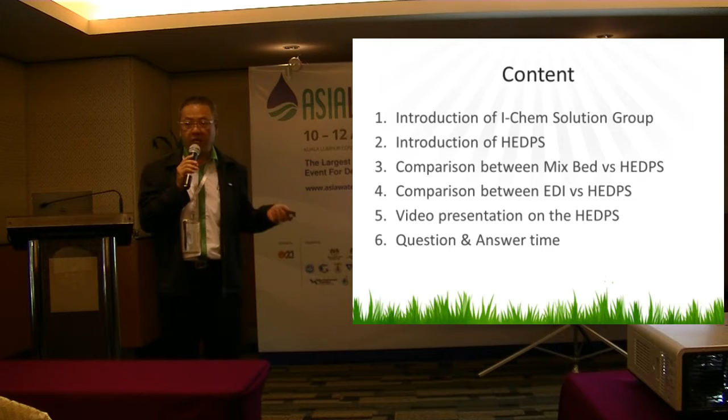Today, I would say that we are present in Malaysia, Thailand, Indonesia, Singapore, Vietnam, Bangladesh, Myanmar, Laos, Cambodia, and the Philippines. Basically, we are a regional-based company, but our HQ is in Malaysia.

Okay. So today we have a team with the green shirts running around in the exhibition. All my technical staff are engineers, chemical engineers or mechanical engineers, with more than 200 years of combined experience now. My management staff have a minimum of 20 years in the water treatment field, and have been working in MNC companies. So this is how we work.

So you can see that we are not just strong on the chemical side. I-Chem Solution is strong on the biological side also, biological treatment. We have also set up a very comprehensive lab where we can analyze all the wet chemistry, deposit analysis, resin, product development, R&D. HEDPS is part of our R&D together with universities. We also optimize the specifications needed for the water. For the past 15 years, I-Chem Solution has been very focused on water only.

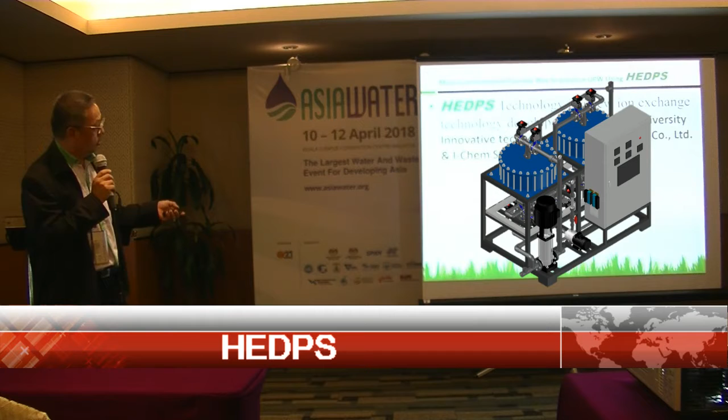So now we actually go into the HEDPS. What it does is more toward the process. Nowadays people are talking about Industry 4.0, where the system can be fully automated. That is one of the directions we work on together with the university, and we came out with the idea. It was about 3 years of work, 2 years of research. Then they patented it. Now this unit is fully distributed for ASEAN countries plus Sri Lanka and Bangladesh.

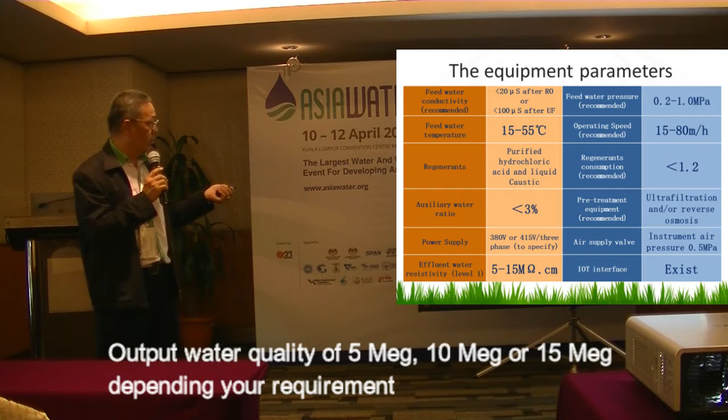So I want to give you a very quick rundown on this one. This unit basically depends on the feed water quality and on what output you want. The output water can be 5 megaohm in terms of water quality, 5, 10 or 15. That will determine what your input should be. So your input can be from below 20 microsiemens after RO or below 100 microsiemens after UF.

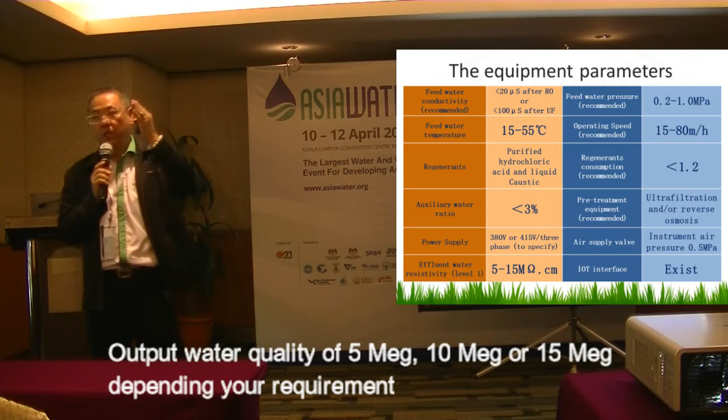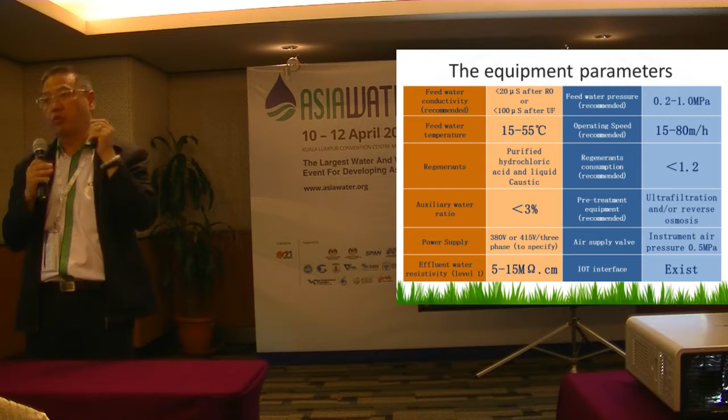Why must we have the pre-treatment after RO or after UF? That is because this resin is only about 10 cm to 15 cm high, and there is no free space. So there is no tolerance for suspended solids. That means the SDI itself must be quite good. Normally, if you talk about SDI, you want to control it below 5.

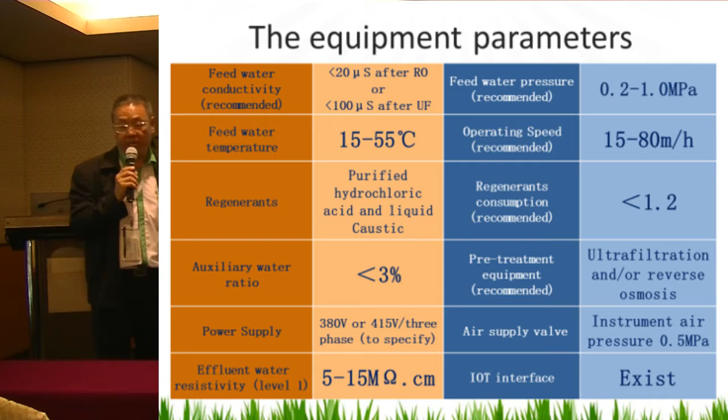The feed water temperature, we say 15, that's the normal temperature. But the key thing here, the regenerant is still purified hydrochloric acid and purified caustic soda. Feed water pressure 2 bar to 10 bar, that's what we can run the flow at.

Then the key thing here, the regenerant consumption, compared to a normal resin, normal twin bed or mixed bed, where you require 200 to 250 gram per liter resin. In here, you probably require about 30 to 50 gram per liter. So that's how we work it out. Later I will show you a comparison of how much the saving is on the regenerant side.

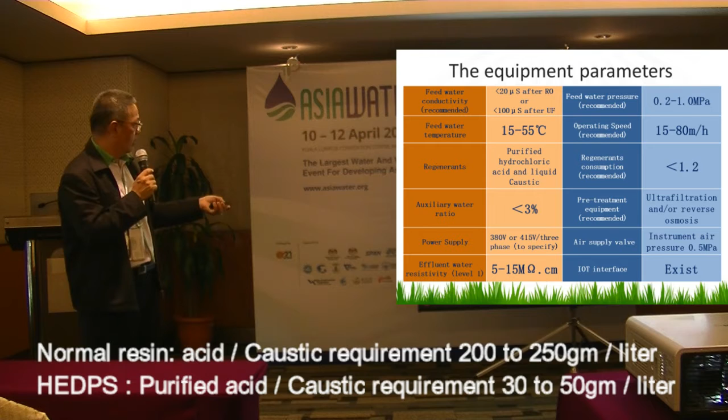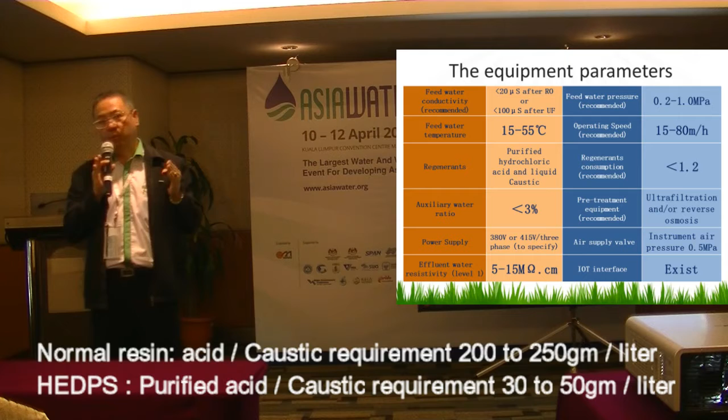Then you are talking about the ratio. For this resin, for this system, the rinsing time and the regeneration time are very, very short. Normally, our program runs only about 10 minutes. For the twin bed, for the cationic, normally you run about 3 minutes. For the anionic, another 3 minutes. The rinsing time, about 4 minutes, then back to service.

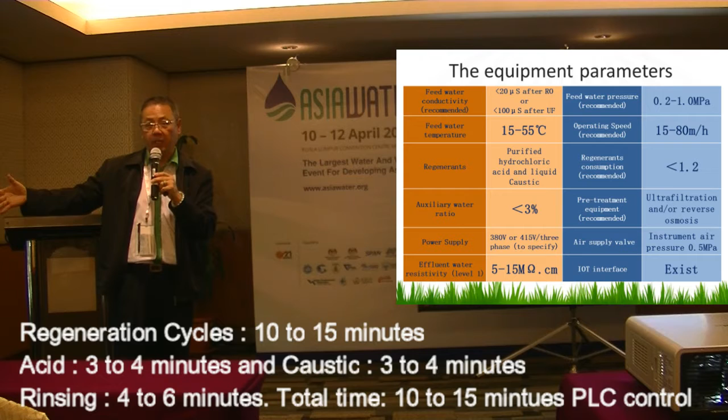So the whole process is about 10, at the longest you can program it up to 15 minutes. That's how you control your output quality. But if you maintain, let's say 10 meg, then you can run it shorter.

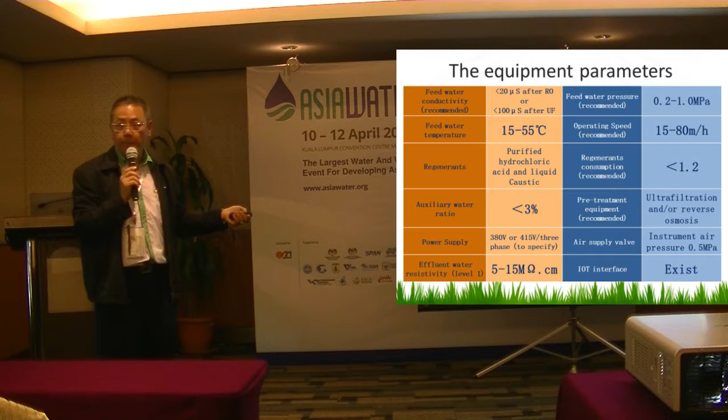Then instrument air, and the pre-treatment requirement is either UF or RO, reverse osmosis. And the IoT access: this is a fully PLC system with a data logger inside. So you have data every 10 minutes. You can plot the graph and know what is happening in the system over midnight, because generally you don't need any people to be there. It runs fully auto.

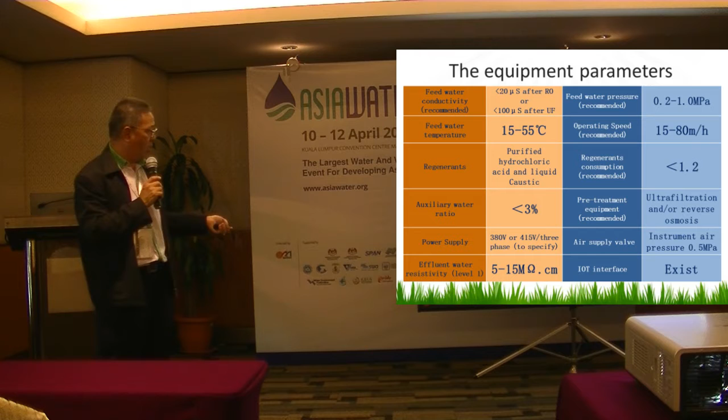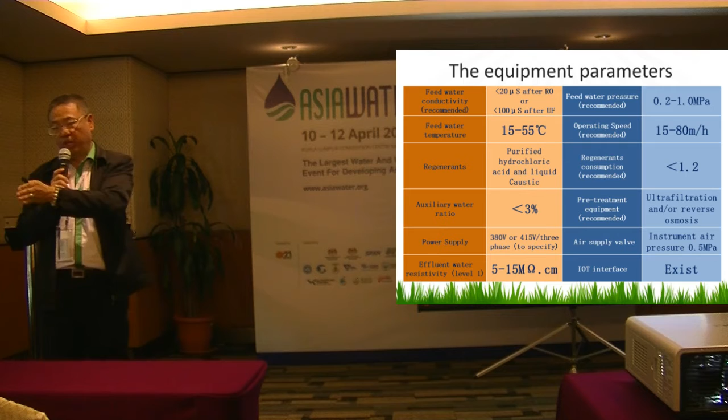Okay. The water quality outlet, you will get about 5 to 15, depending on the input. 5 megaohm is the lowest, normally about 0.2 microsiemens. For medium pressure boiler feed water, that's good enough. Some electronics users will look at 15, then go into electronic grade polishing to get to 16.8. That is for the electronic side.

So this is the modular unit currently available, 10 cubic meters per hour flow rate, or 25 or 50, depending on the bigger size. We can design custom made up to 100 cubic meters per hour, but that needs to be customized because it depends on what quality you prefer. Okay, but this is the modular one we want to promote in the market.

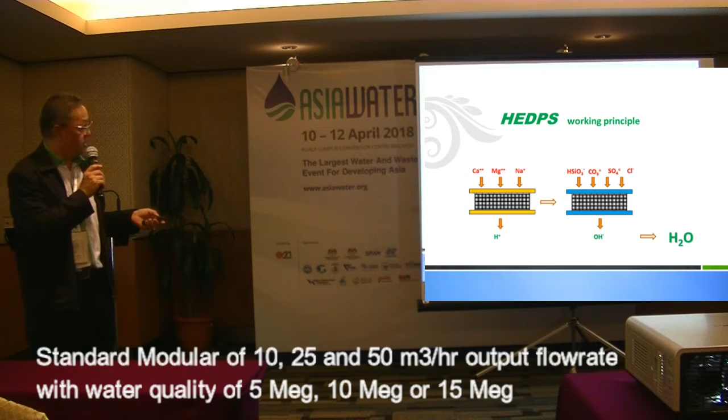Okay, this HEDPS working principle is very straightforward. It's the same thing. With the cationic, passing through this one, you will get your H. Then the water passes through another anionic module, and you get OH. Then you combine them and get H2O.

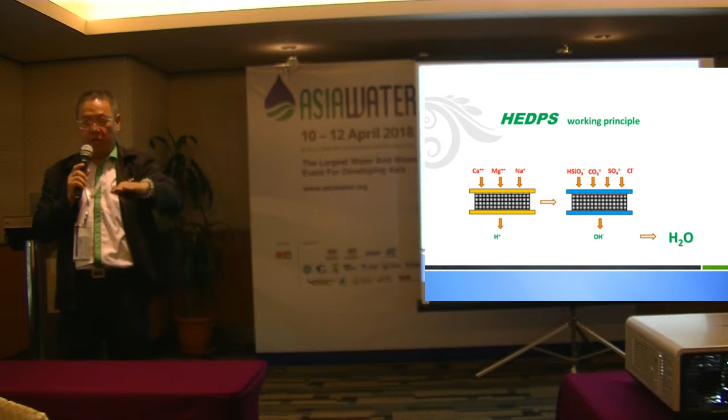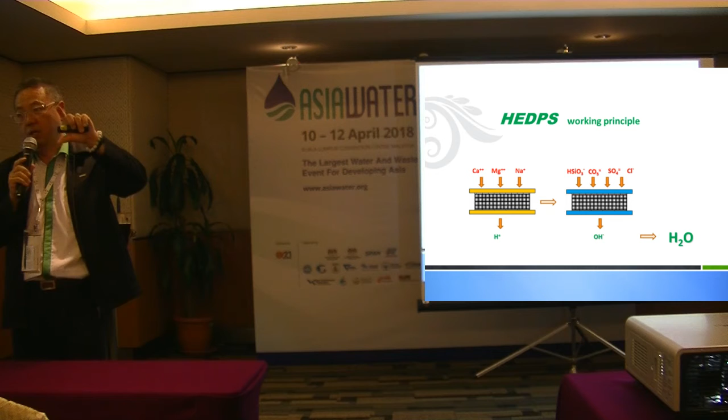It's exactly the same as your twin bed resin, except here they remove your exhausted resin zone and the ready-to-regen, ready-to-serve zone. You only take the working zone. So that's the reason why you only have about 10 to 15 cm height of resin in the vessel.

So this is a comparison between mixed bed and HEDPS. Okay, I give you a very good example. This is a system flow rate of 25 meter cube per hour. Water quality required is probably more than 10 megaohm. So water saving, you can imagine, if you talk about the regeneration step for the mixed bed after RO, you want the mixed bed running. So your regeneration probably is about 5 days, 120 hours per regeneration.

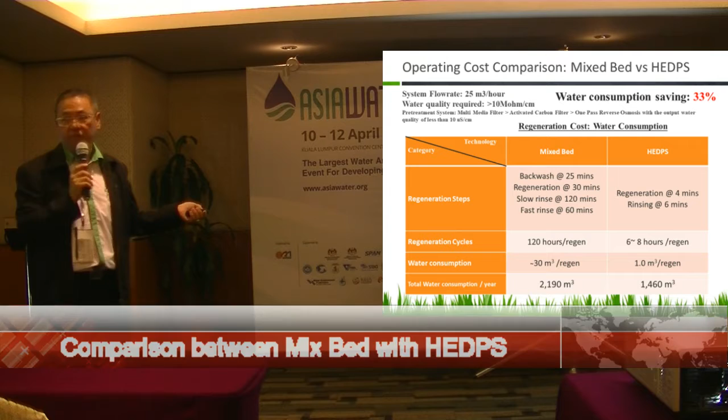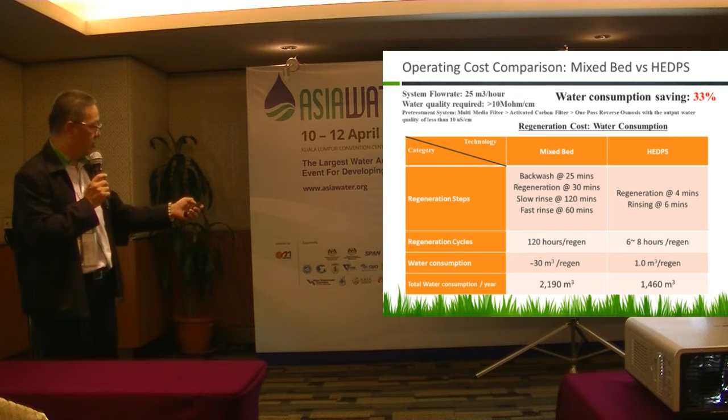So you require around 4 to 6 hours regeneration time per regeneration cycle. And the water you use normally per regeneration is about 30 meter cube. So you have to have clean, good water, 30 meter cube, for the rinsing time. Based on this calculation, your total consumption of good water is about 2,200 meter cube per year.

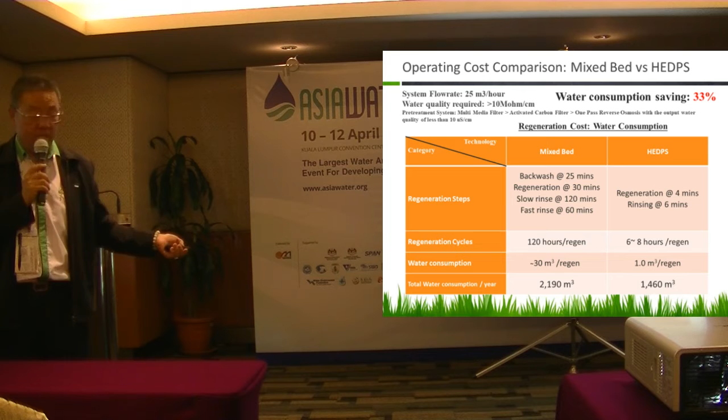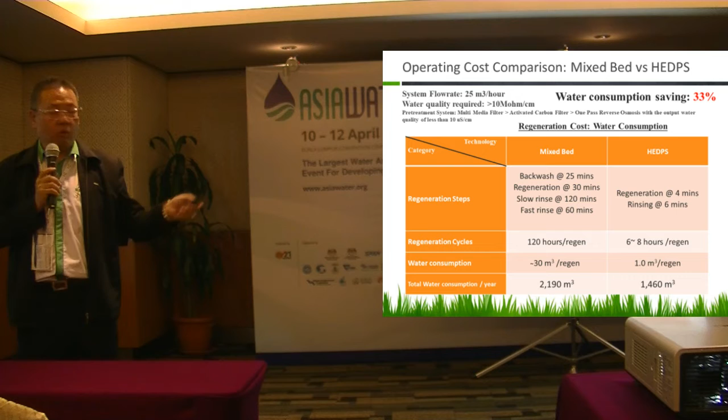But based on the HEDPS, your regeneration time is about 10 minutes per regeneration. Each regeneration cycle is about 6 to 8 hours, normally. Our unit running in Senawang is up to almost 30 hours because they are not running continuously. But if we run continuously, it will run around 6 to 8 hours per cycle. One cycle, you only use about 1 meter cube of water for rinsing.

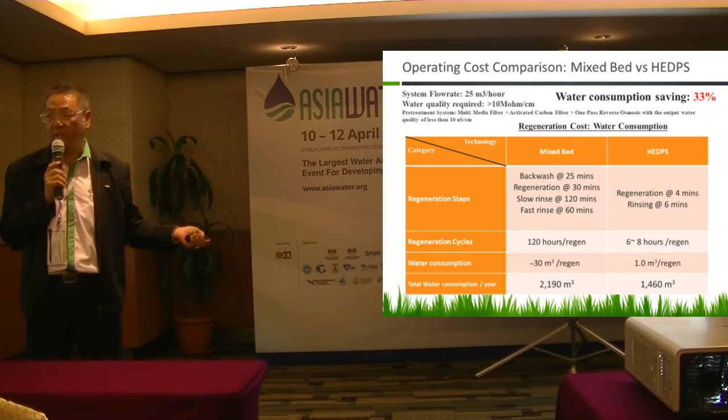Then, the total water you use per year is about 1,460. So you are saving per year close to about 700 meter cube of water. Okay, this is compared to the mixed bed. How about their chemical consumption? I think this is something more interesting.

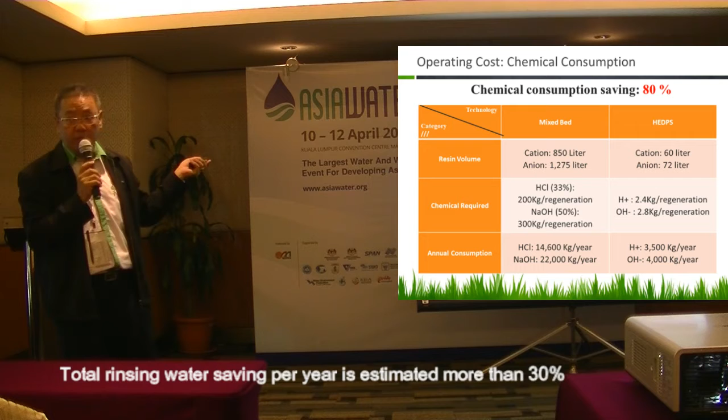Based on the 25 meter cube, if you look at the resin volume, we need about 850 liters, because normally you need about 100 gram, 100%, per liter of resin. You work out it's close to 200 liter of 33% acid. So you require every year about 14-15 ton. But if you compare, the resin volume here is about 60 liter, so you need only about 2.4 kilo per regeneration.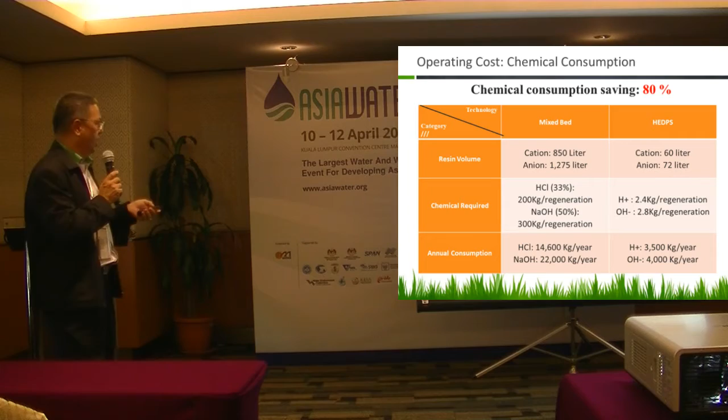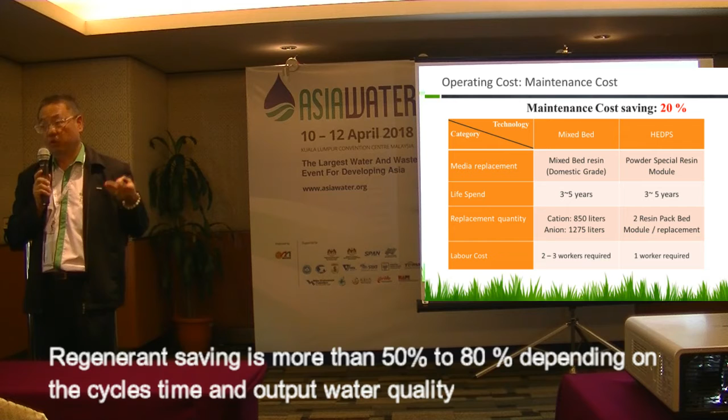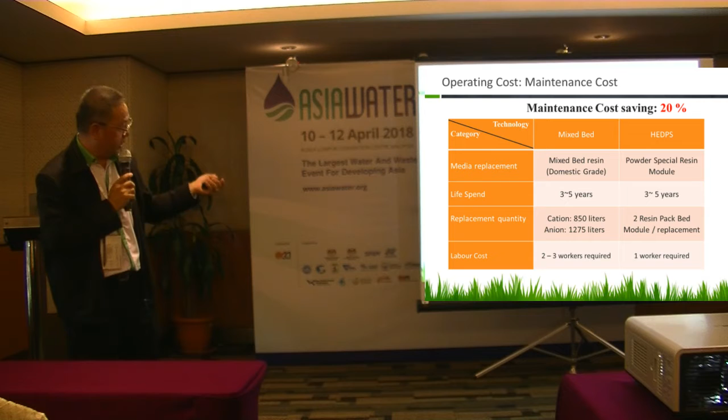Then, mixed bed compared to HEDPS on the maintenance side. For the mixed bed, resin needs changing every 3 to 5 years, depending on operation. Here it's the same, probably 3 to 5 years. But because we only focus on the exchange side, not on suspended solids and fouling, we only change the module.

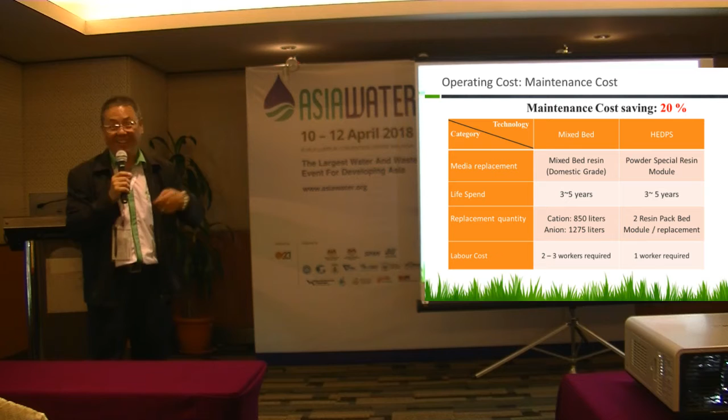Because this resin is packed like a cake, it's something like plug and play. You change your anionic module, plug in, and within probably half a day you can run again. With a mixed bed, easily you require about 2 days just to put it back into service. So this is how you compare the mixed bed and the HEDPS system.

Then how about EDI? Most of the time people talk about EDI because so far it can produce the best water quality without any people interfering. Not like mixed resin, where you need a lot of regeneration, people have to pay a lot of attention, and you need a skilled worker. But EDI has drawbacks, which you probably all know.

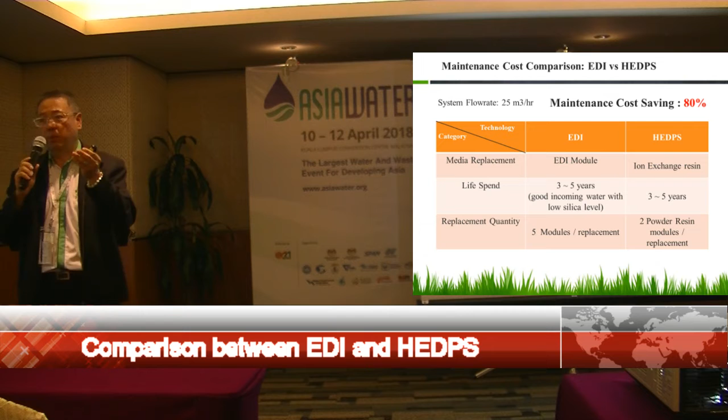To run EDI, you need a 2-pass RO, 1st pass and 2nd pass. Why? Because one bad drawback of EDI is that it requires very good water quality. Generally, it requires a very low silica level in the water. That's why they run 2-pass RO.

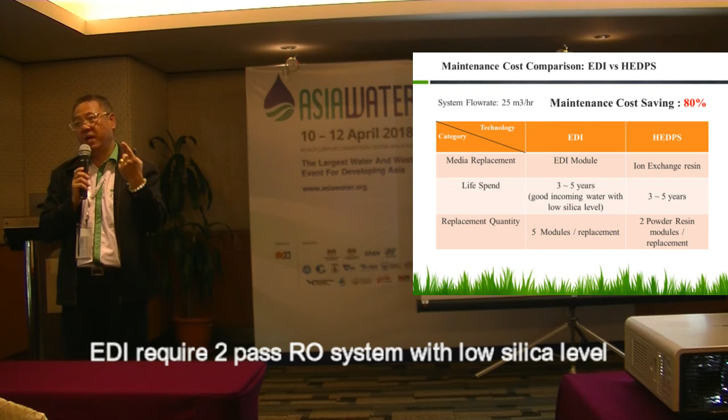For HEDPS, you only need to run 1-pass RO. 25 meter cube, 10 meg water quality. Same thing, you only need to run 1-pass RO. You don't need 2-pass RO. Then you will say that the lifespan here, when you change the EDI, is a module. One module, you change everything.

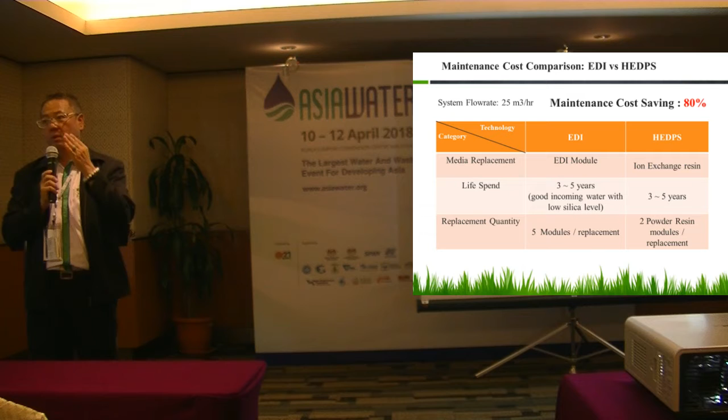One module currently probably costs us about 20,000, 30,000, depending on which model you are taking, from Taiwan, from US. It's easily that. Then you have to replace everything. So here, what you need is you only replace the module. The system, everything is just pump, valve, piping, the controller. That's all. You only take it out, put it back. So that is actually how easy it is.

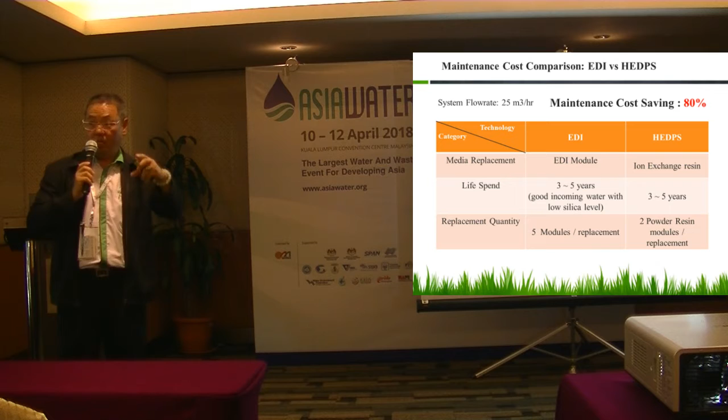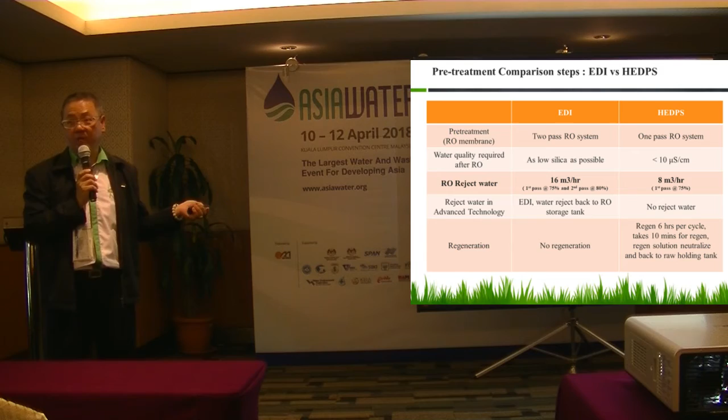So the maintenance cost itself, definitely compared to EDI, the payback is much better because with EDI you have to change everything, the module. Then EDI, I just now mentioned 2-pass RO, 1-pass RO, as low as possible. Reject water, let's say you need about 16 meter cube compared to 8 meter cube for 1-pass RO. So that means if I run 25 meter cube, this one I need to have about 41 meter cube feed for the pass.

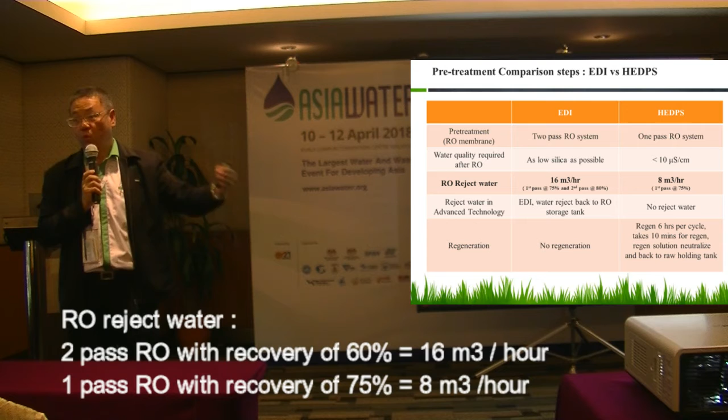So I need a bigger pump to run 2-pass. But this one I only need about 25, 33. I put a smaller pump so I can save on my investment side. Then all this one, you can see no regeneration, but EDI, basically the water reject can go back to RO storage, then you can use it back. Same thing here, but here you need no reject, but you can also reuse this water, put it back to the front, neutralize and put it back. If you have this one also can.

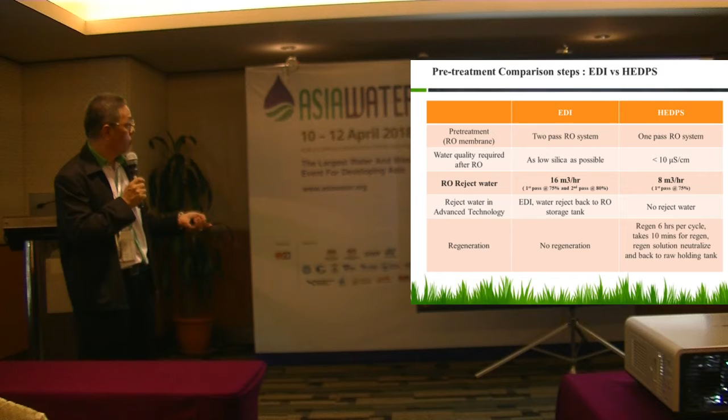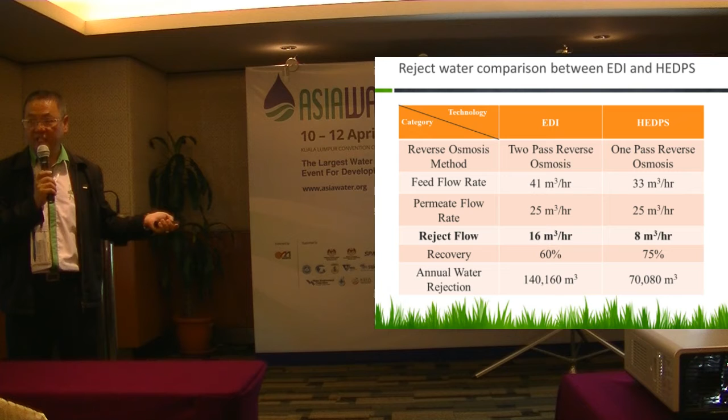So if you compare on the water side, reject water comparison on this one, just imagine 2-pass RO 41, so you get 16. So your recovery is about 60%. So annual water rejection, you are talking about 140,000 meter cube reject water. But running on the single pass RO, you are running 75% recovery. This is very normal. 70,000. So just imagine on the water rejection side.

You have here immediately, this is not talking about HEDPS, but talking about the process of water before going to the HEDPS or before going to the EDI. The water is already saved almost 50%. So you actually can size down on your pump, on your water preparation side. That's actually the unit that we can actually work on. So this is actually talking about sustainability.

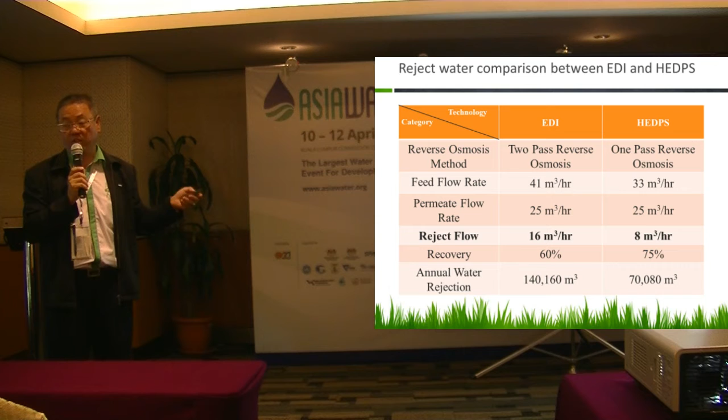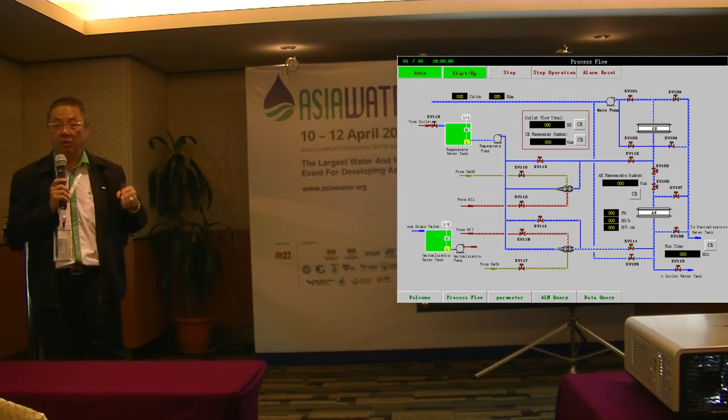Then once you have this one, you will see all the piping. You can see cation, anion, all with the flow, with the pressure, and what your regenerant level is. So everything is actually inside there. So it's very easy to see, because this is plug and play, and it can run continuously without people interfering. No need to put an operator in there. Yeah.

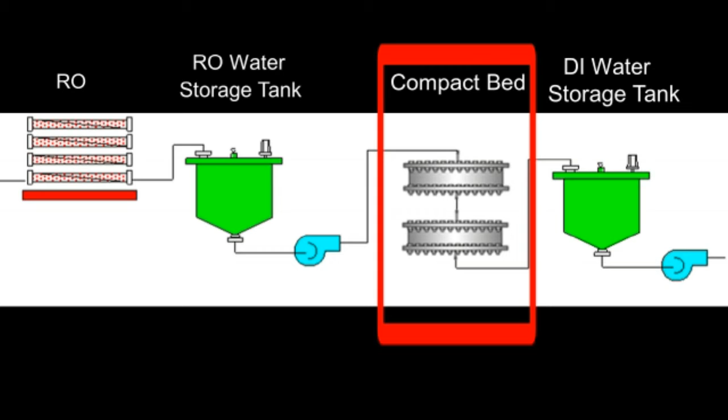HEDPS stands for High Efficiency Deionized Purification System. HEDPS is developed in cooperation between Zhejiang University Innovative Technology Research Institute, VASAR Valve Company Limited, and I-Chem Solutions Sendirian Berhad. HEDPS produces high quality deionized water with new ion exchange compact bed technology.

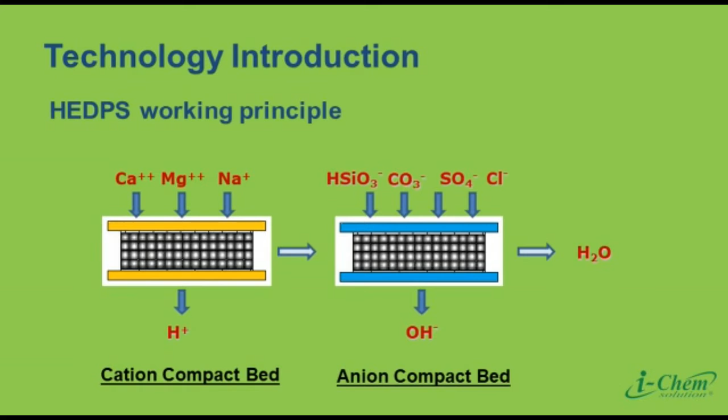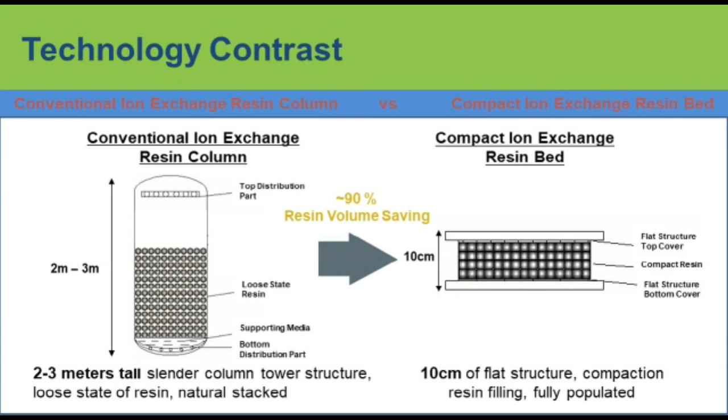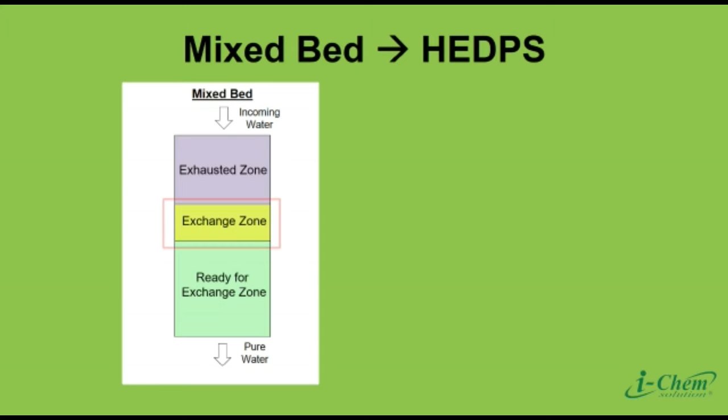The new compact ion exchange resin bed can help to save up to 90% of resin volume. HEDPS is upgraded from the mixed bed DI system by developing the exchange zone, removing the exhausted zone and ready for exchange zone, which both are not performing effectively in the deionization process.

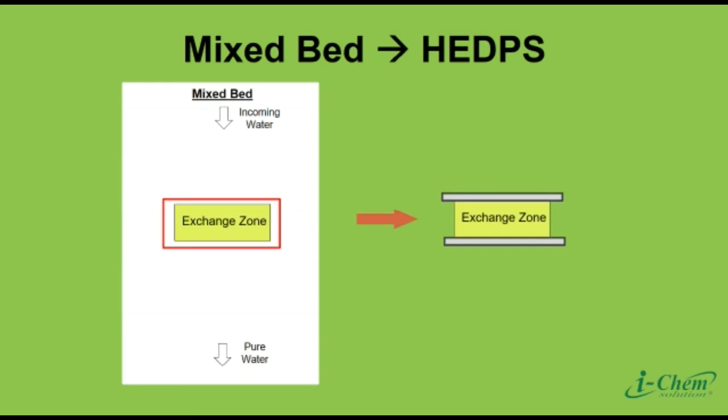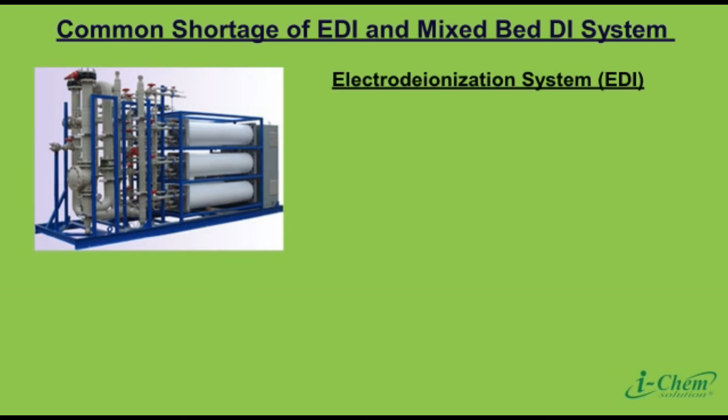In earlier times, EDI systems and traditional mixed bed DI systems were commonly used to produce DI water. However, there are shortcomings found in both deionization systems. The EDI system is unable to remove silica effectively and causes fouling problems. It requires higher quality feed water, with shorter service life and higher maintenance cost.

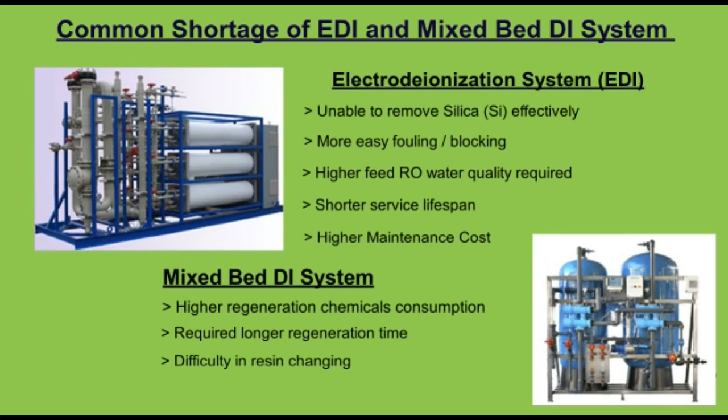The traditional mixed bed DI system's disadvantages are that it consumes higher regenerant dosage and water, and requires longer regeneration time. The mixed bed DI system also faces difficulty in resin changing maintenance. HEDPS is used to replace EDI and mixed bed DI systems, with better performance, fast regeneration time, cost saving, easier operation, low maintenance, and environmental friendliness.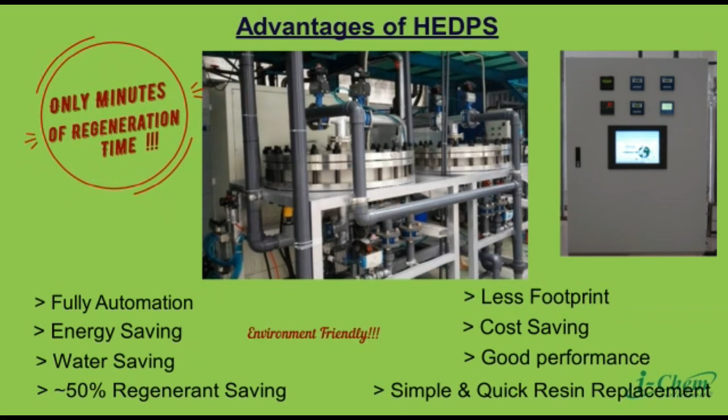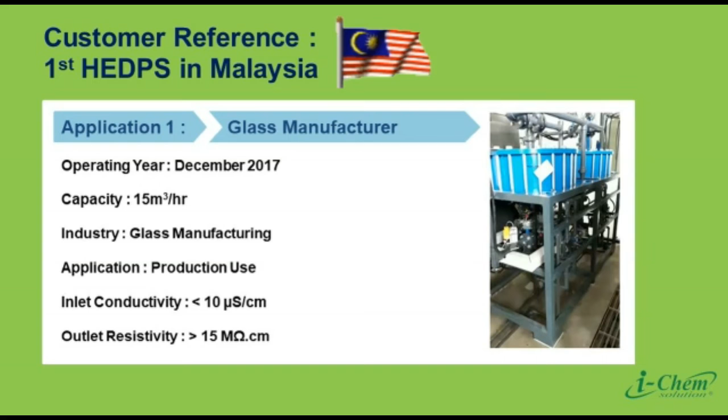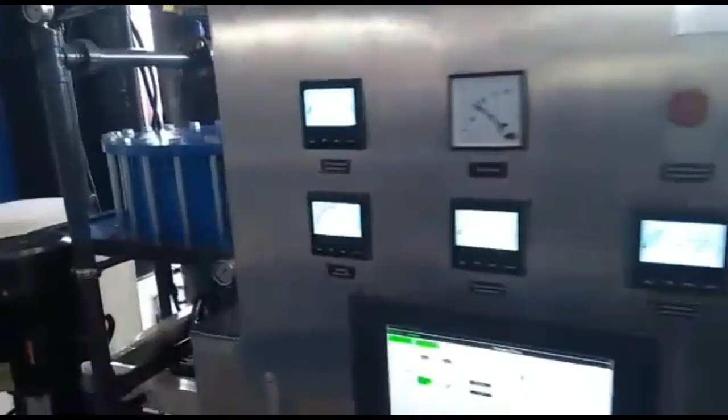The first HEDPS was installed and operating in Malaysia, done by I-Chem Solutions Sendirian Berhad in December 2017. HEDPS is designed fully automatic in operation, cleaning, and regeneration. HEDPS is able to produce high resistivity deionized water, consistently more than 15 megaohm, with minimum operation cost.

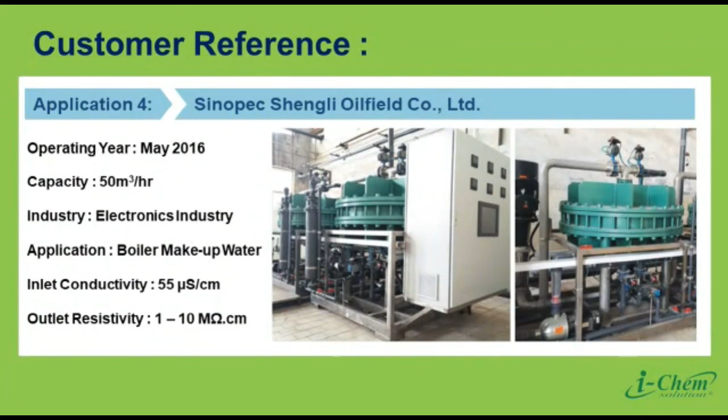Compared with the traditional mixed bed system, HEDPS is able to save up to 10% of capex, 40% of opex, 90% of resin quantity, and 50% of regenerant dosage.